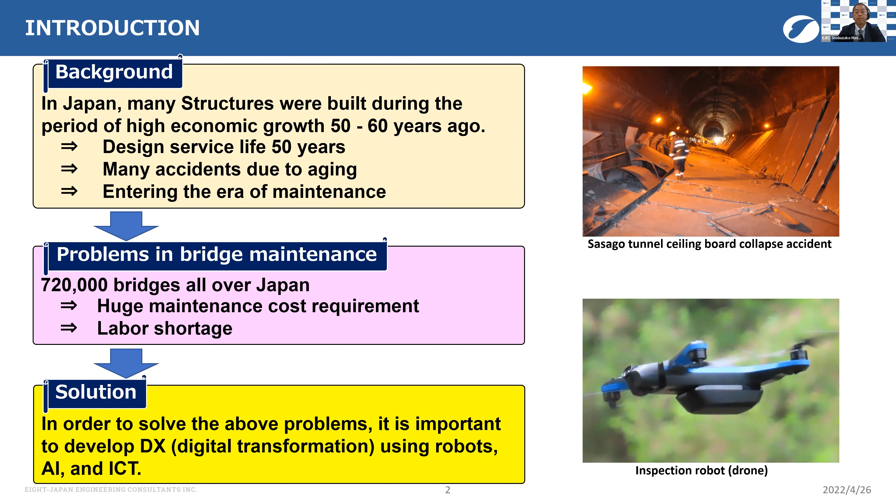These are the topics we will talk on today, divided into two parts. Firstly, research and development: number one, advanced bridge inspection and DX using drone; number two, utilization of 3D scanning and development of 360 degree editor; number three, development of water drone; number four, emergency damage reporting and development of local live stream with 4K web camera.

Secondly, introduction of non-destructive testing: number one, concrete tester used for testing compressive strength of concrete; number two, Auris exploration used for shape and damage exploration of structures. Thank you everyone, Rupesh will continue the presentation hereafter. Mr. Rupesh, please continue the presentation.

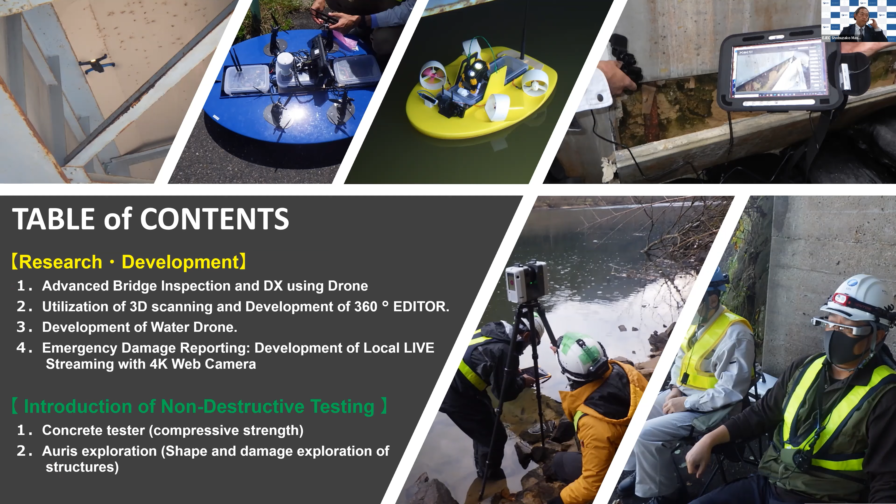Thank you, Mr. Shoubuzako-san. In continuation on the research and development, the first topic is advanced bridge inspection and DX using drone. We would like to give a brief introduction of infrastructure inspection and general bridge inspection methods being employed these days. Basically, infrastructure inspection involves collection of visual information of site conditions or damages if any, taking measurements, and conducting simple non-destructive tests like surface salinity test, compressive strength test, etc.

The general inspection methods being employed these days are as follows: ground level inspection, inspection using ladder, and inspection using bridge inspection vehicles. These are frequently used methods, whereas on special occasions or special sites, inspection through rope access and boat, etc.

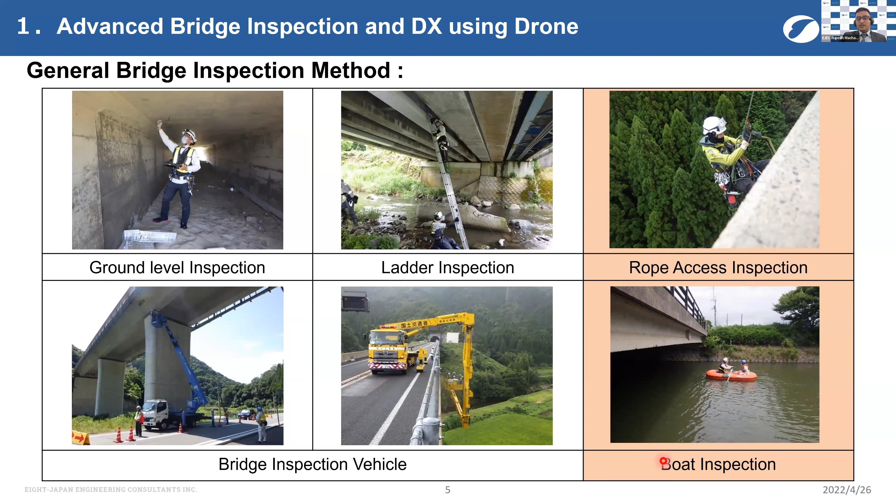Conventional inspection methods are labor intensive and time consuming. In recent days, technologies such as drones and scanners are being employed to carry out inspection and investigation work. In this session, we would like to talk about the utilization of drones in inspection and its advantages.

While conducting inspection on roads, especially busy roads, it is often necessary to regulate moving traffic to ensure smooth traffic flow. Enforcing road traffic regulation may sometimes lead to unwanted traffic congestion, which can be inconvenient to road users who are in a rush. Therefore, using a drone, this inconvenient road regulation is not necessary to be enforced.

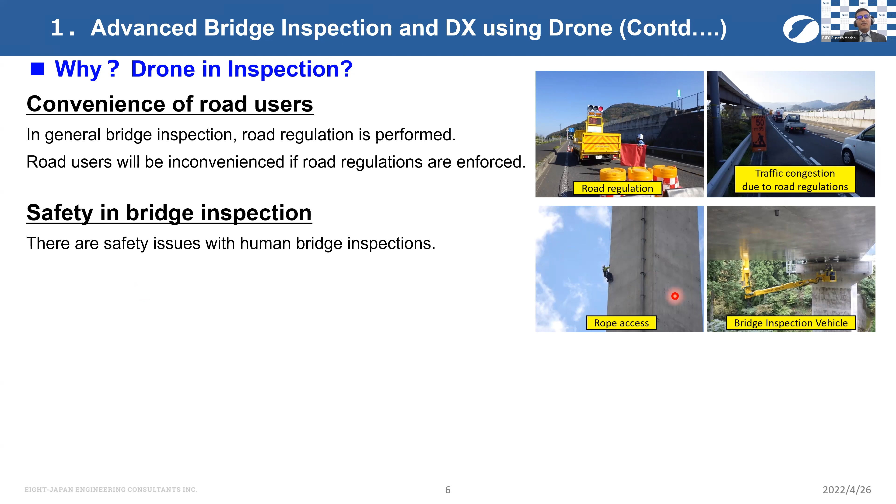Likewise, safety issues are a priority concern in inspection. Human casualties or risks of accidents in dangerous places, for instance breakage of ropes in rope access or falls from the bucket of the inspection vehicle, can be completely eliminated by using drones in the inspection.

Similarly, conventional bridge inspection methods require a large number of manpower and time, which increases the overall cost of inspection. Therefore, inspection using drones can be conducted with less manpower and in less time. The problem of manpower shortage in inspection can also be addressed using drones. Due to these reasons, drone inspection is preferable to other conventional inspection methods.

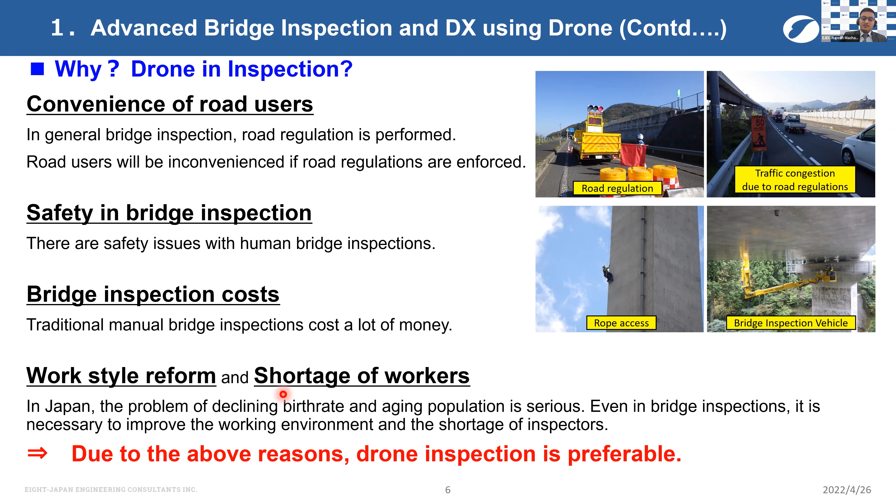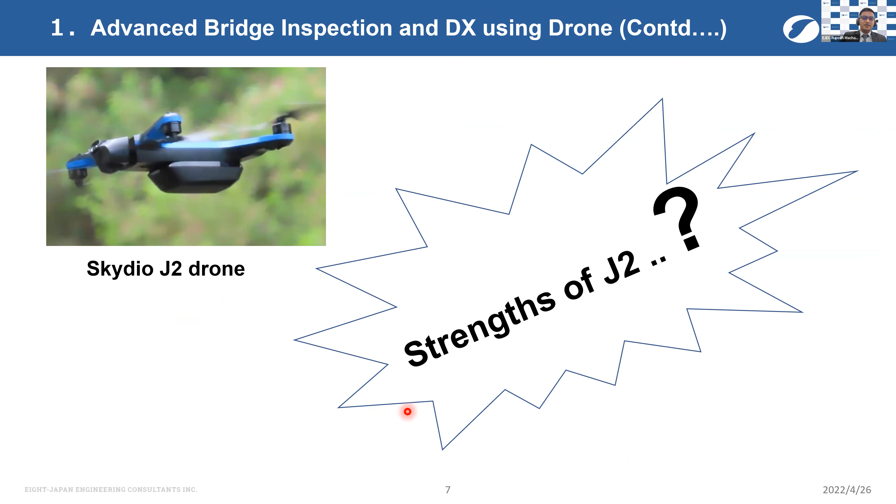Today we would like to introduce you to a high performance small non-collision drone, the Skydio J2. The general features of this drone are similar to other drones. However, this drone has some special features which are better than its close competitors. Let's move on to the strengths of the J2.

The first feature of the Skydio J2 drone is vertical or upper part shooting ability. While undergoing bridge inspection with a drone, the drone employed should have the ability to shoot vertically to ensure efficient coverage or a better view of the target. Generally, the shooting camera of a normal drone is mounted facing down, which is why it captures images or videos facing the ground from the sky.

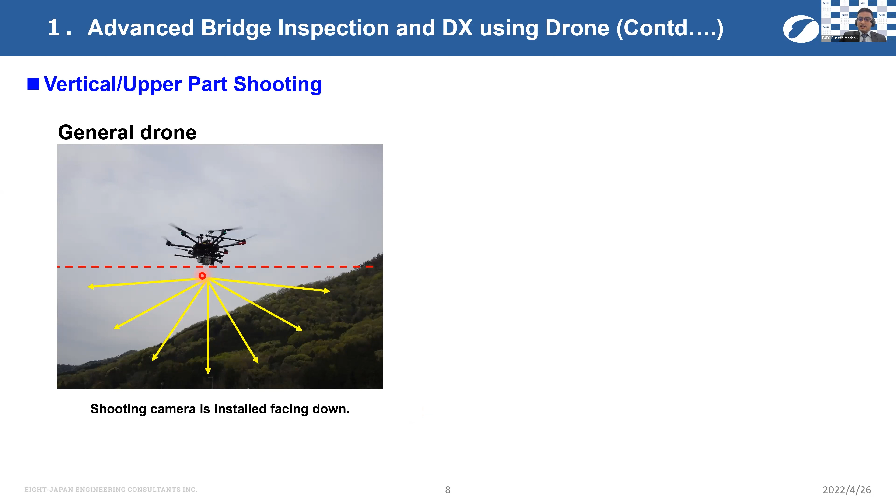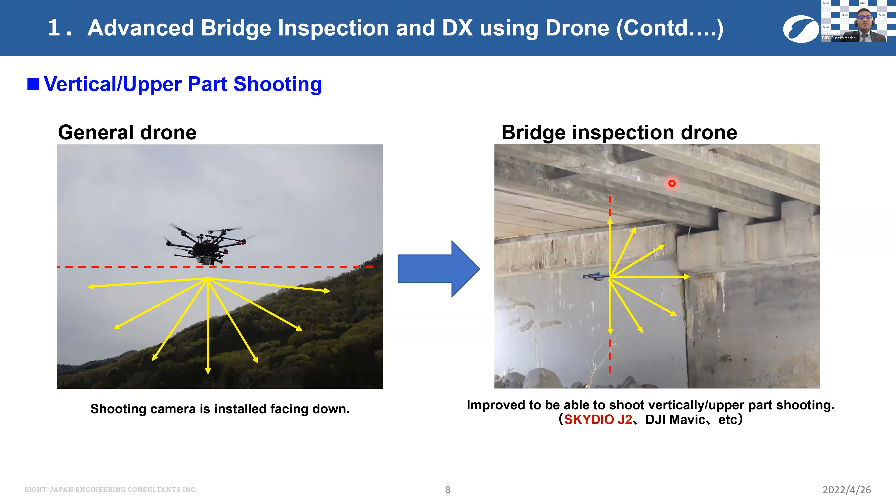To facilitate vertical shooting, technological advancement to improve the drone camera has been made. In particular, the Skydio J2 has its main front camera attached with a gimbal setup so the drone operator can adjust the shooting angle up to 180 degrees vertically. The Skydio has a unique function that allows the camera to face straight up, making it easy to shoot the ceiling under a bridge, which was difficult to shoot with a conventional small drone.

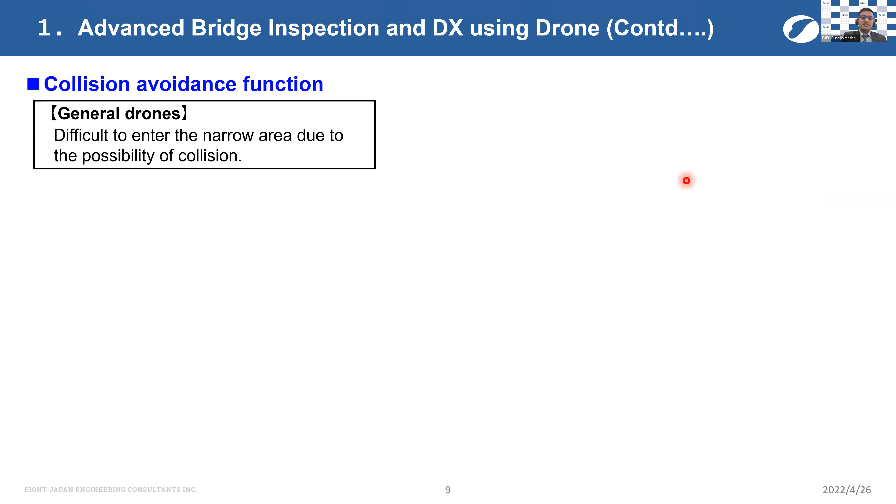Second is the collision avoidance function. General drones are difficult to use in narrow spaces between girders and trusses due to the risk of collision. However, the Skydio J2 can be operated safely even by pilots who have no experience operating drones in such places.

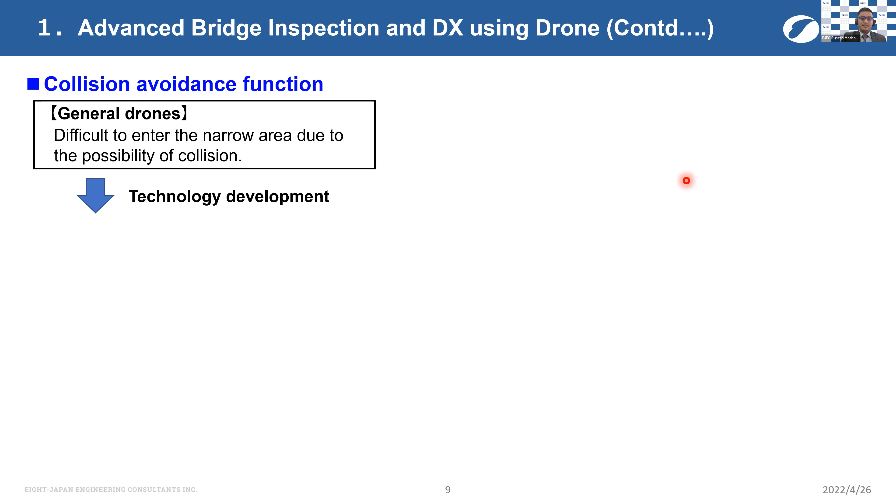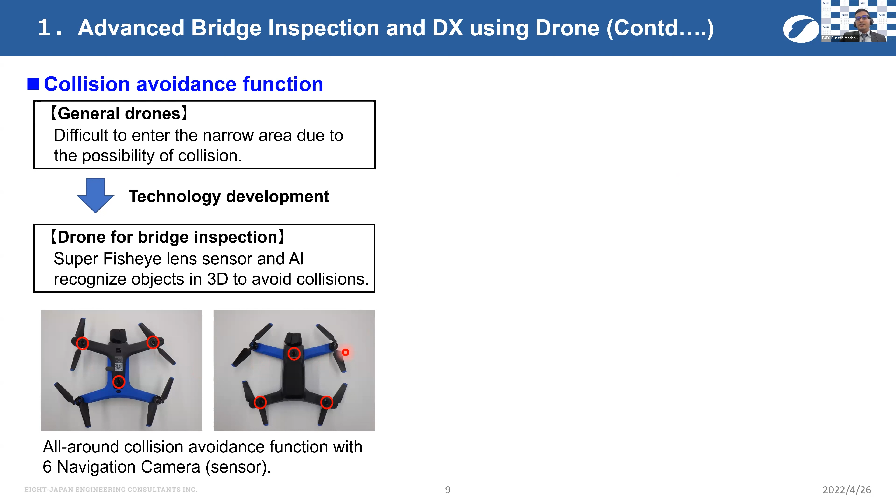Skydio J2 has 6 sensor cameras mounted on the top and bottom surface of the drone that take 360-degree pictures, and the image just taken is analyzed by AI to check the surroundings, recognize objects in 3D, and avoid collision. Obstacle avoidance allows the drone operator to navigate through tight spaces and conduct close-up inspection of detailed assets.

We can choose from 3 obstacle avoidance modes in the settings. The first is standard mode, which provides a safety barrier of 87 centimeters between the Skydio and obstacles. Close mode keeps the drone 28 centimeters apart from the obstacle, and minimum mode gives an 11 centimeter safety barrier between the drone and the obstacle. We can also disable the obstacle avoidance feature, however the disabled setting should only be used by experienced pilots.

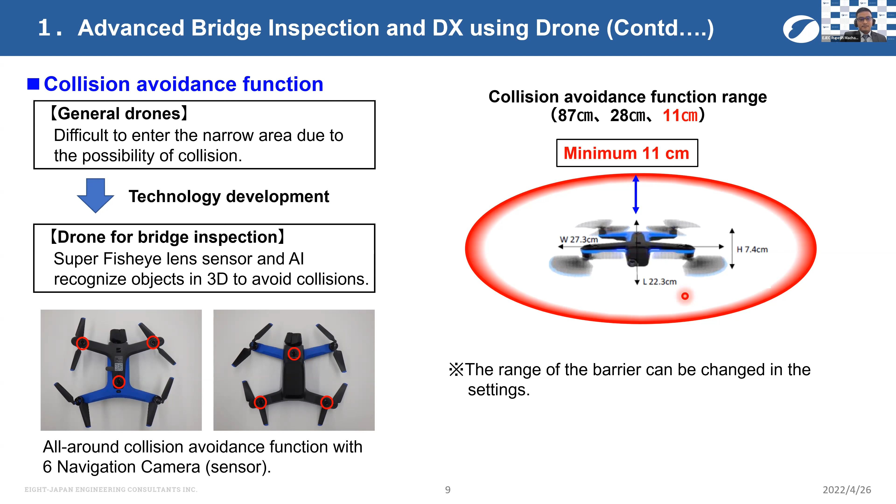Skydio J2 can also be flown in weak or non-GPS environments. As mentioned before, the Skydio J2 has 6 Super Fisheye lens sensors that take 360-degree images, which are analyzed by AI, so any obstacle near the surrounding is recognized to avoid collision. With these two features, collision avoidance and flight under non-GPS environments, the J2 has easy access to narrow spaces between girders and beams.

The video on the left is taken from a normal camera that shows the drone entering narrow areas smoothly, whereas the video on the right is the recorded video feed of what the drone is looking at. To understand the features more clearly, let me play a short clip of an actual drone inspection.

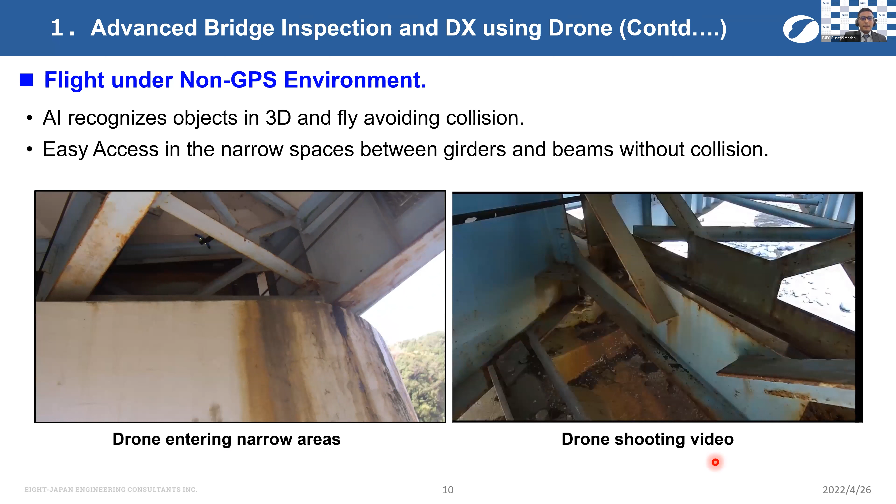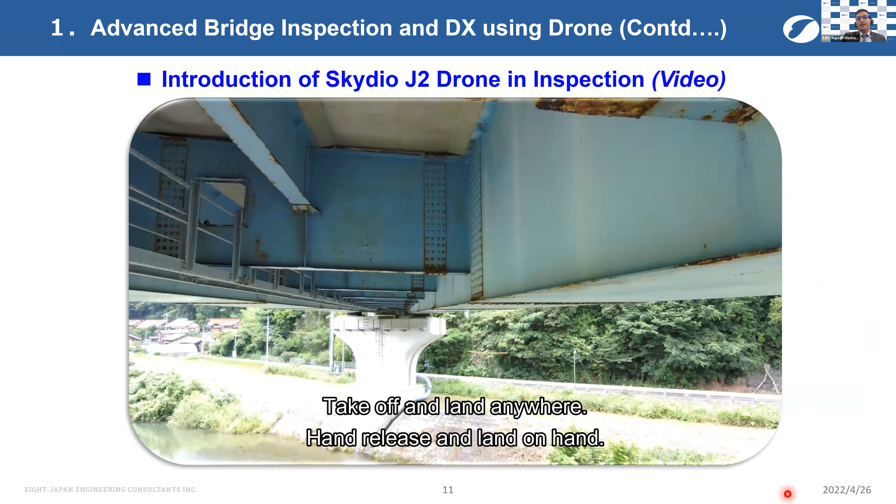Since the drone is small in size, takeoff and landing can be done by hand. This drone can be flown very close to the bridge components, allowing photographs to be taken as if from a close-up manual inspection.

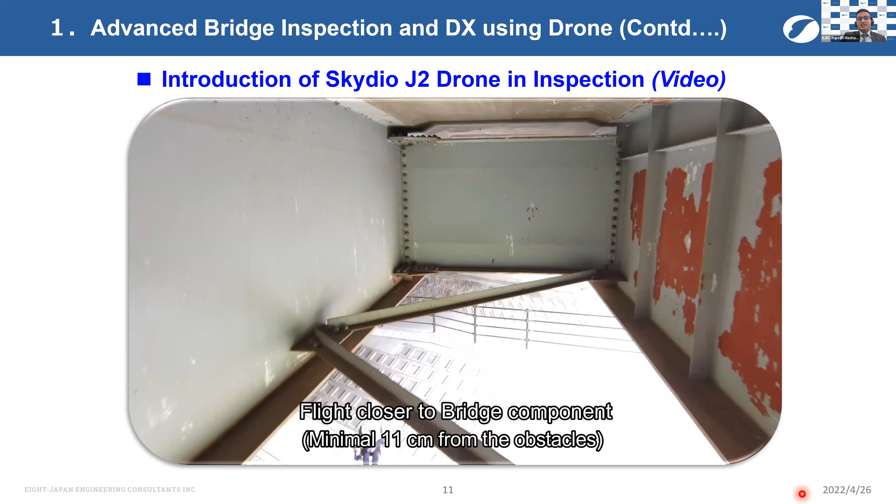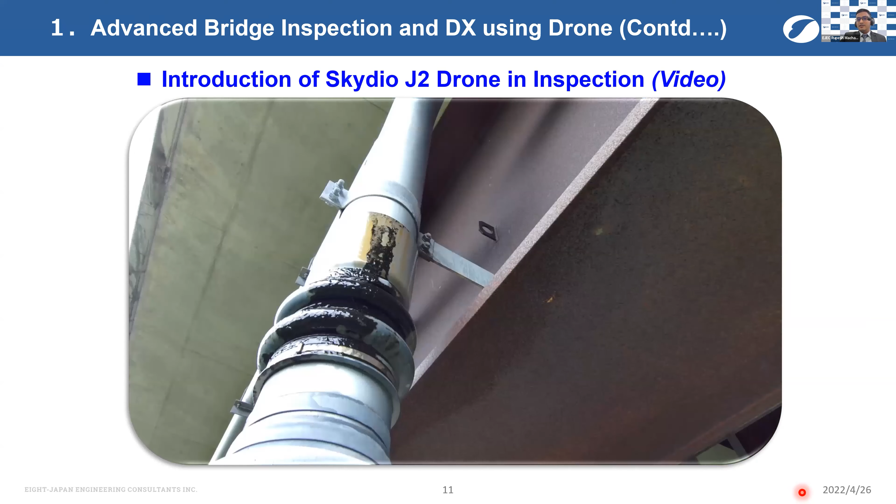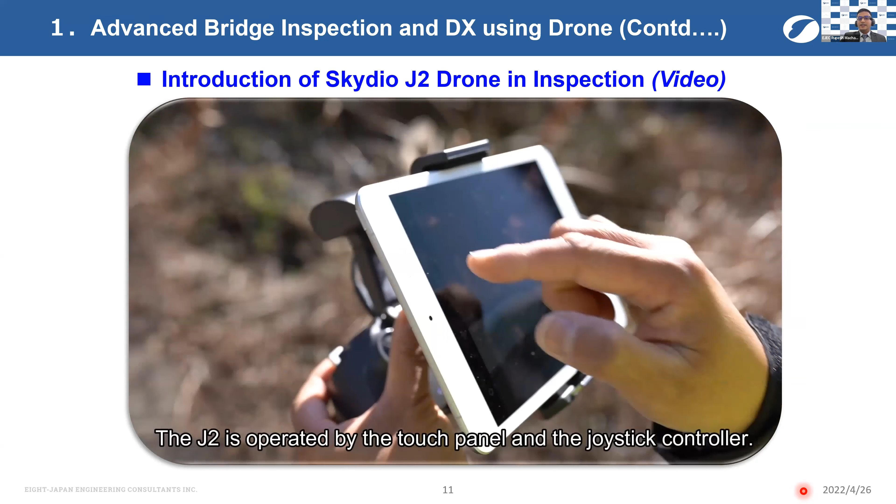Flying under weak GPS conditions, such as under the bridge, is possible without the risk of collision. This drone is operated using an iPad or joystick controller, as are many other drones.

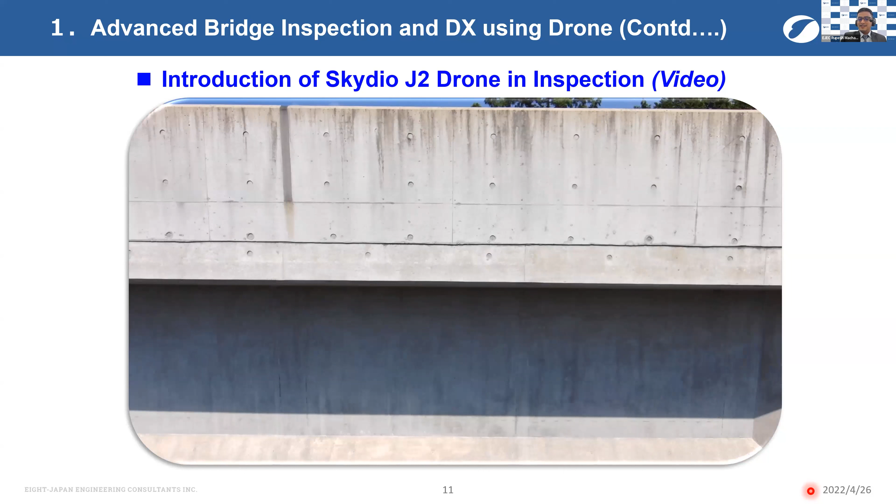Also, there may be risks of interference with pilot operation if many hands touch the controller. To avoid those risks, mirroring of the controller screen can be done with a large monitor, but the volume of luggage to be carried to the site increases.

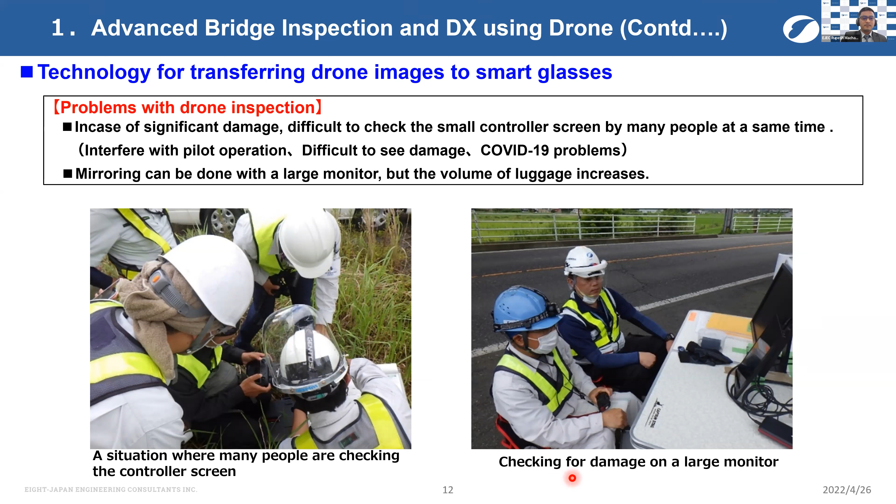With continuous study and improvement in technology, to solve the requirement of multiple drone views while undergoing inspection, smart glass technology was combined with a high-performance video transmitter, due to which the damage evaluator, primary inspector, and the drone operator can have the same drone view at the same time without any risk of interfering with the drone operation.

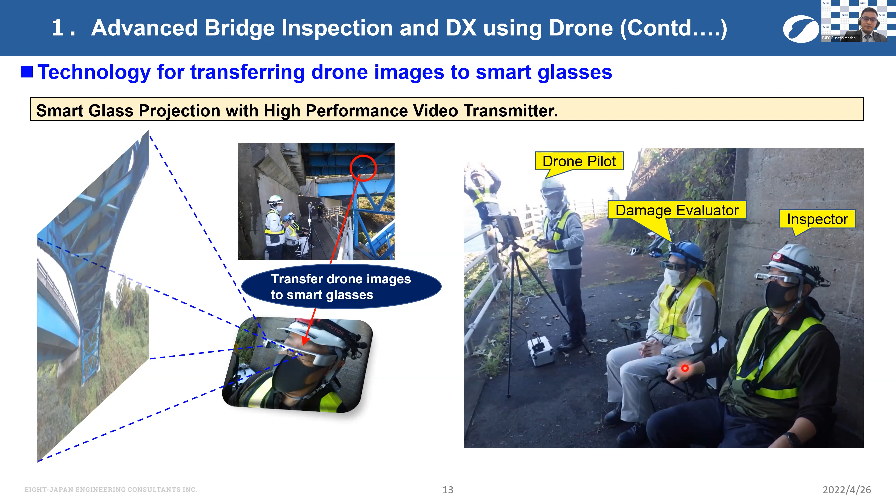Moving on to the second topic, which is the utilization of 3D scanning and development of a 360-degree editor.

In repair and seismic retrofitting design of existing old bridges, the designer requires final as-built drawings to base their design on. In most cases, there are often no drawings left, and even if available, design drawings may have some errors due to changes made during construction.

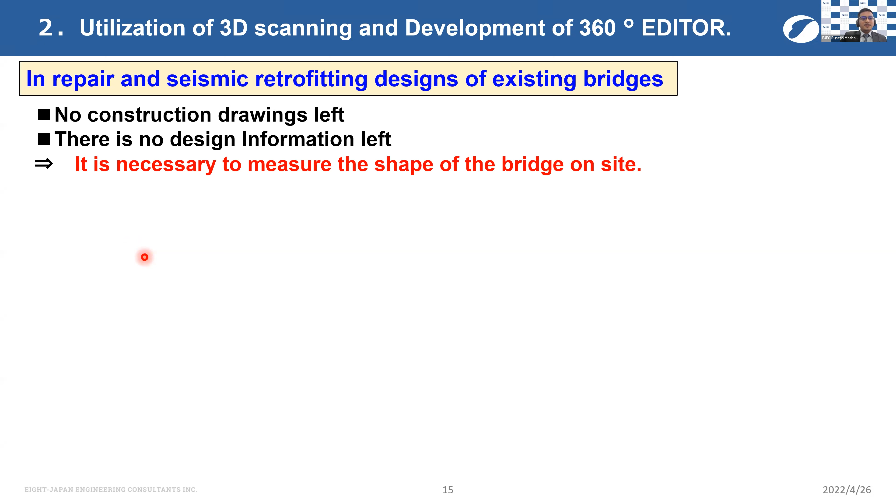For that reason, the inspector on site manually measures and creates drawings and other design information, but this requires significant time and resources, and can cause measurement error. They often fail to capture all the details, or may find errors in the original design as well.

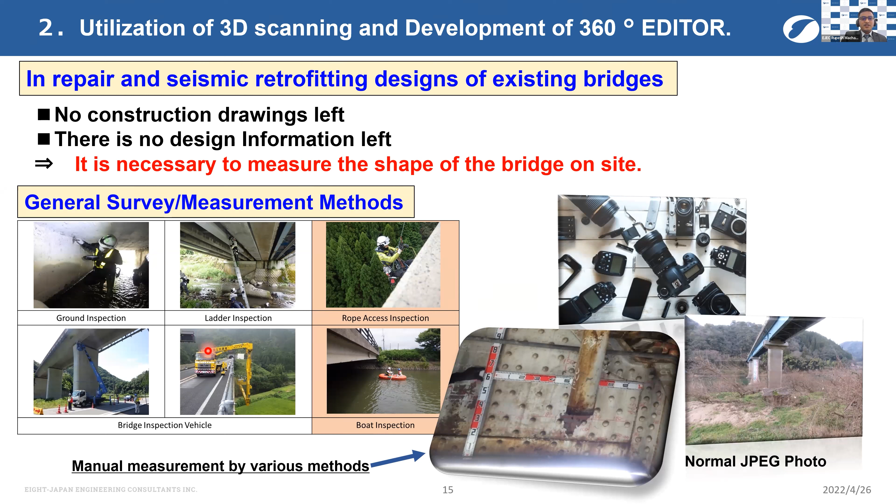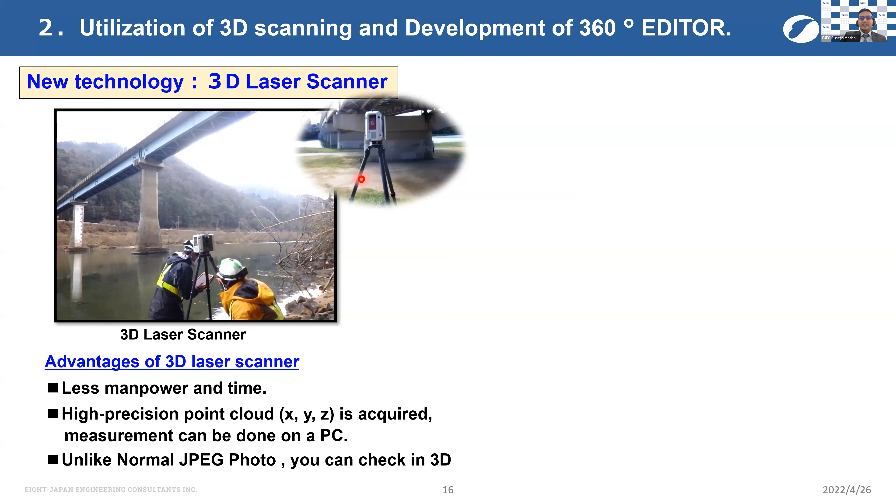Considering those problems, high definition surveying using laser scanner is introduced, which is a new method to capture a highly detailed 3D image during the inspection. In this method, instead of using conventional cameras to capture the visual image, lasers, which are much more accurate, are employed. Some of the advantages of using a 3D laser scanner are...

3D laser scanning can be conducted with less manpower and in less time. The 3D laser scanner collects a set of data points, also known as point cloud data, and maps them on a grid coordinate of X, Y, and Z, so that measurements can be taken on the PC. Unlike normal JPEG photos, we can also check the 3D scan in 3D.

Some of the uses of 3D scan data are as follows: mapping existing site conditions in renovation and rehabilitation projects, validating proper design execution, and measuring and evaluating progress. Using 3D scan, we can also create 3D building models.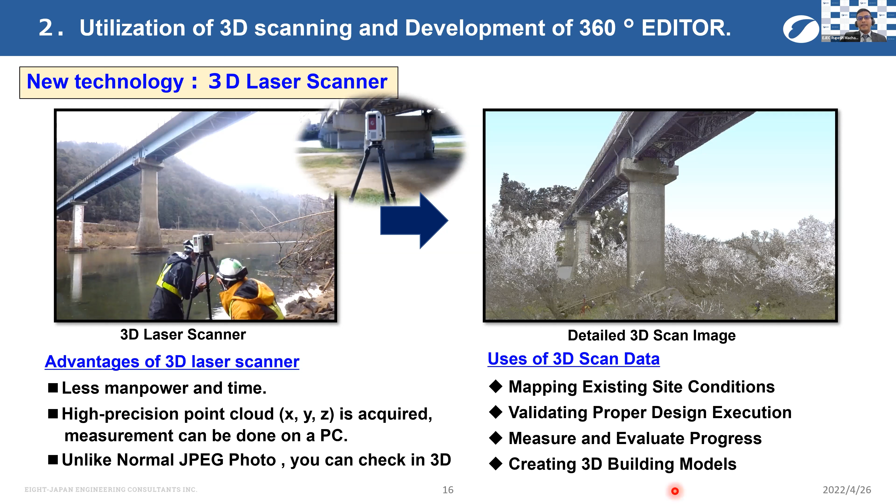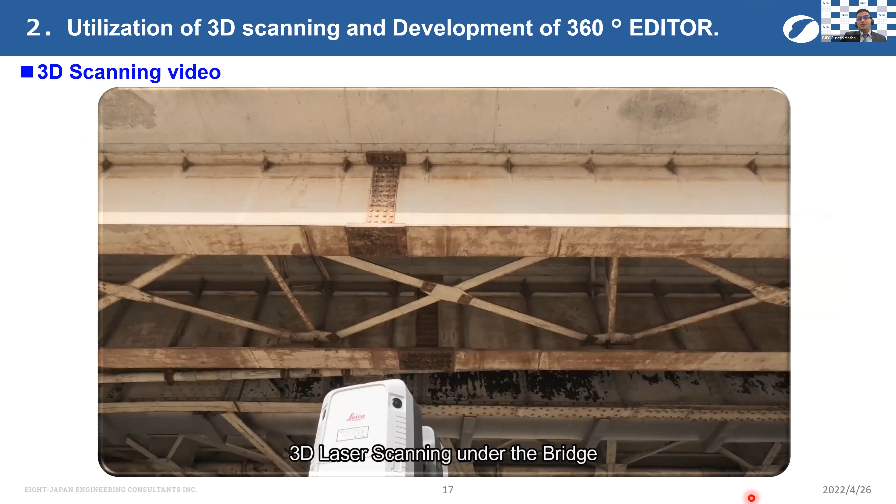This video is about the complete workflow from data acquisition on the site to 3D model creation for one of our repair and seismic retrofitting projects.

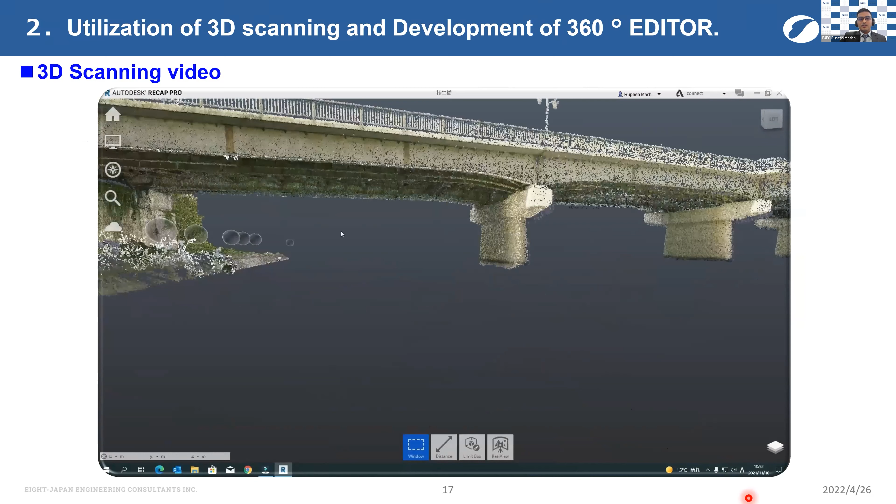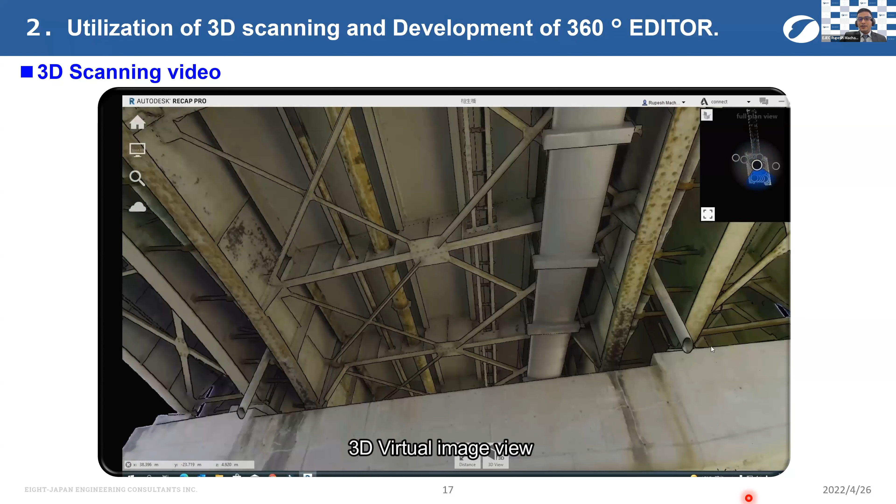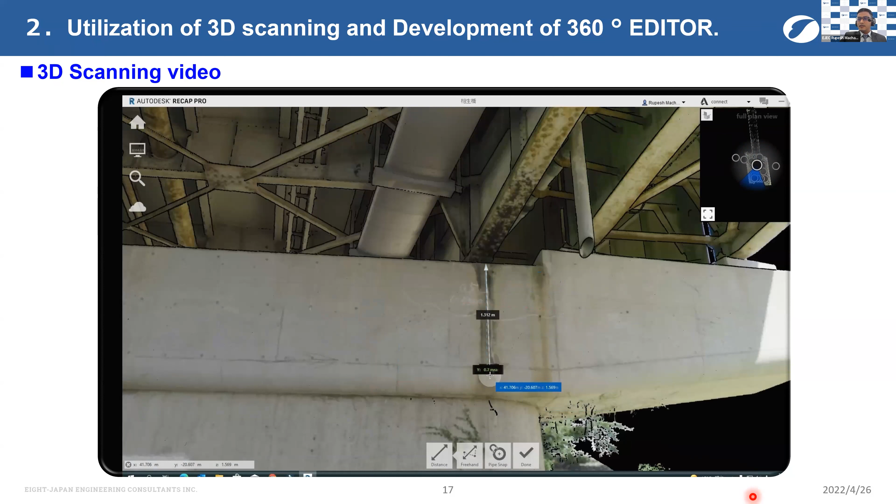So the transparent air bubbles are the scanner setups on the site, and this is the 3D virtual view. Using 3D scan, as I have already mentioned, measurements can also be taken on the screen. This is our final report of 3D model preparation using laser scan data.

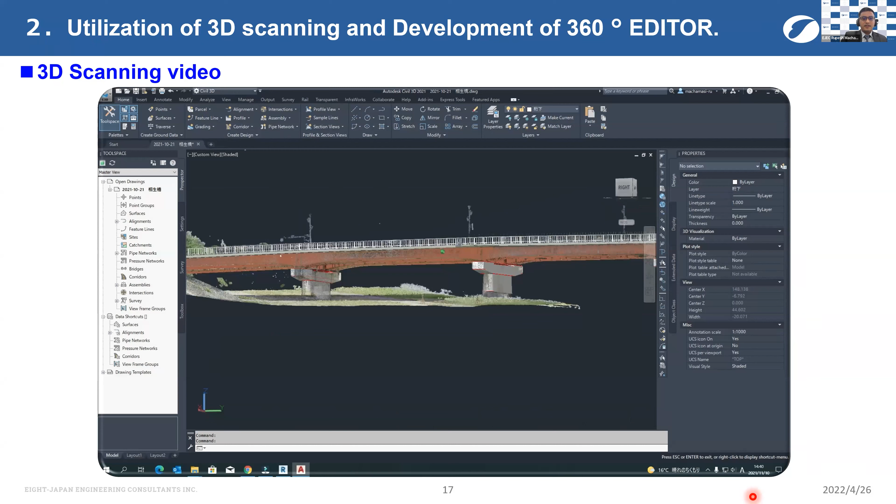As you've noticed in the previous video, the workflow to create 2D drawings and 3D modeling starts from 3D laser scanning on the site, followed by point cloud data processing and deleting unnecessary data, and finally creating 2D drawings and 3D models.

This is a normal method to create drawings from scan data. However, we are working on developing an automatic drawing generation tool or software to make the whole process of 3D modeling and 2D drawing creation much easier.

Despite this technology being easy and convenient to use, it still has some inadequacies. For example, creating a building information model is laborious and quite costly. 3D scans have a large file size, and delivery to the client requires a large storage capacity medium. Similarly, a dedicated application is required to open a 3D scan image, which may not be available to everyone.

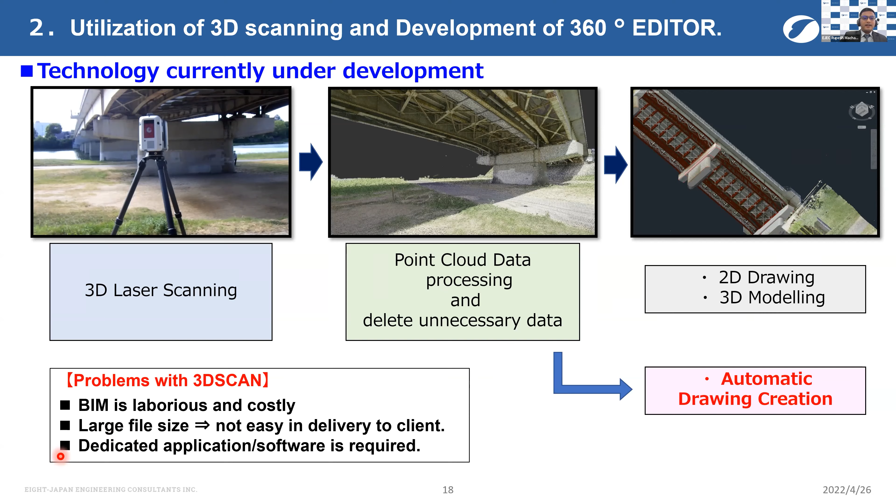Similarly, we have developed a much more user-friendly Kimoto 360-degree editor, which only requires us to take pictures with a normal 360-degree camera and combine the spherical photographs to create a 3D virtual model. That is why users can have a virtual walkthrough experience of the project site.

With 360-degree visualization, we can see the site from the same perspective as if we were in an actual site. The model prepared using this editor can be used as a 360-degree spatial smart library, as various applications such as Word files, Excel, PPT, etc. can be attached into this model. And it has a relatively low file size than 3D scan.

Similarly, complex structure and damage position can also be confirmed in 3D. Normally, 360 images cannot be viewed without utilization of a VR application or cloud VR, which requires significant cost. But there is a free VR app version of Kimoto 360-degree editor, like Adobe Acrobat. And this VR software can be provided to the client.

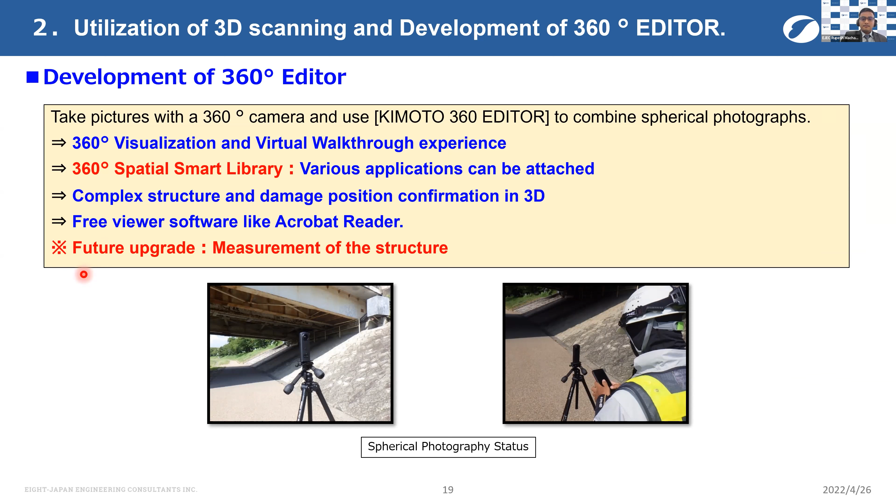This slide is about the basic overview of Kimoto 360-degree editor. It primarily requires 360-degree images, location map or design drawing over which the camera setup are placed, and attachment files to create a 360-degree spatial smart library model, which has relatively low file size. On one click on the link icon, we can open and view the information attached.

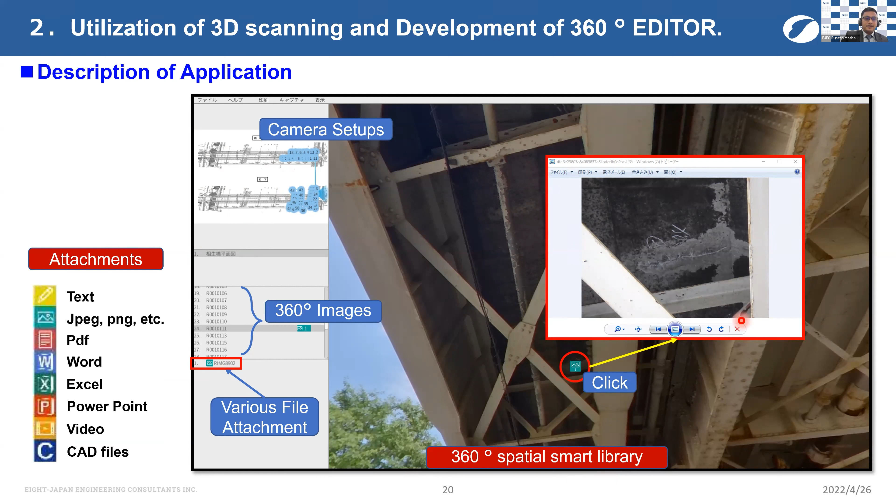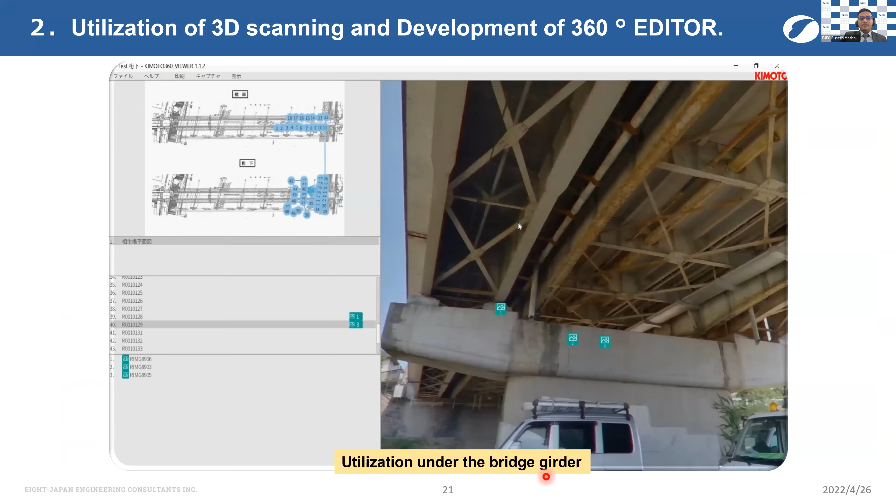Let us watch an example model, utilization under the bridge girder. In this virtual model, we have attached important details such as damage photos, design reports, etc. And thus we submitted this model as a digital report to the client.

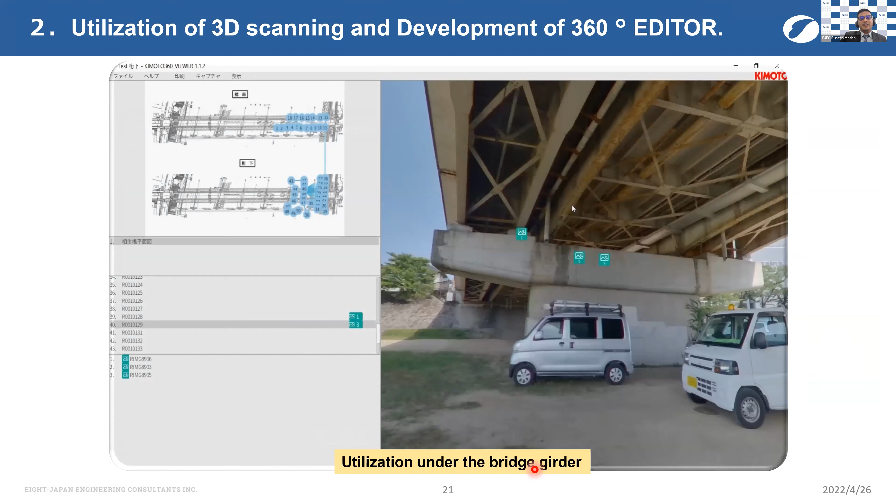So most of our clients have evaluated our model prepared using this 360 editor as easy to evaluate.

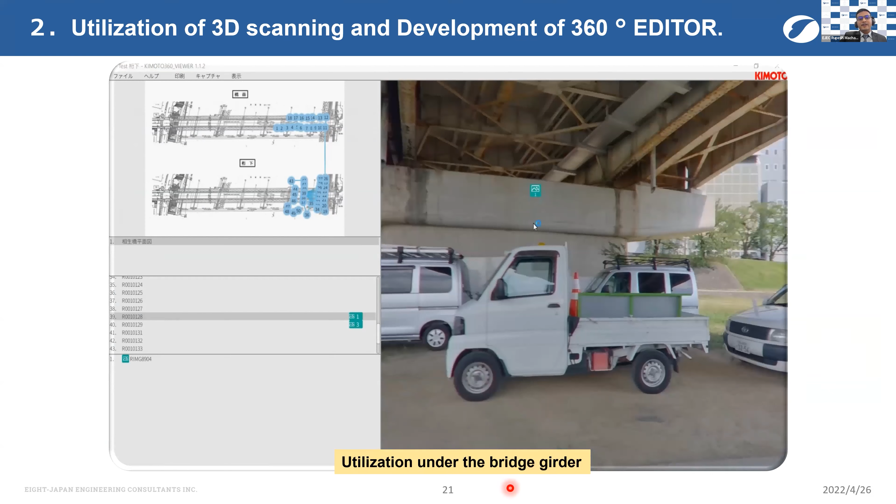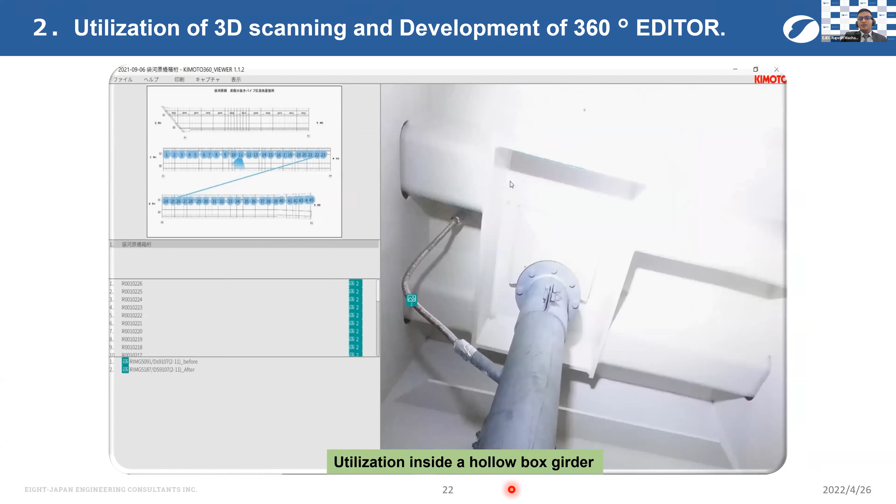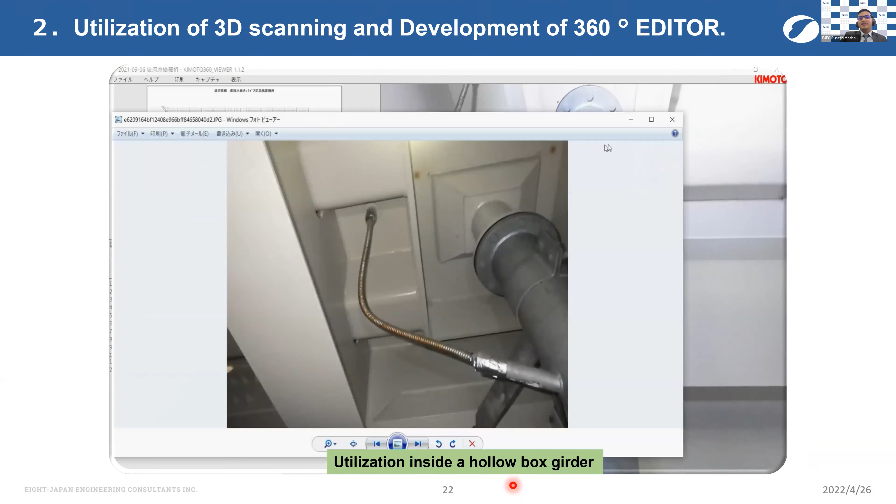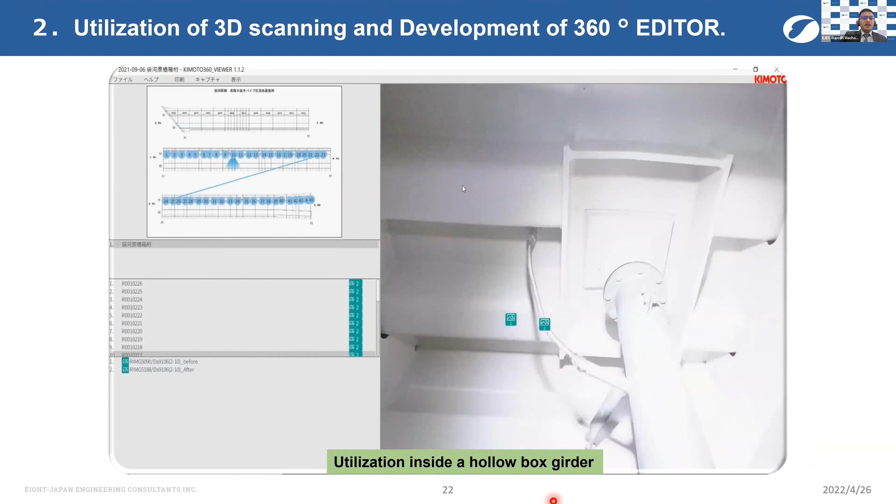Similarly, the 360-degree editor can also be applied in dark areas, such as inside a hollow box girder with minimal lighting equipment. The inside of the hollow box girder is very small and narrow. Therefore, even if we take a 2D picture, we will not be able to know where we were taking that picture at later stages of the project. However, we can use the 360 editor to find out where the damage is located in 3D.

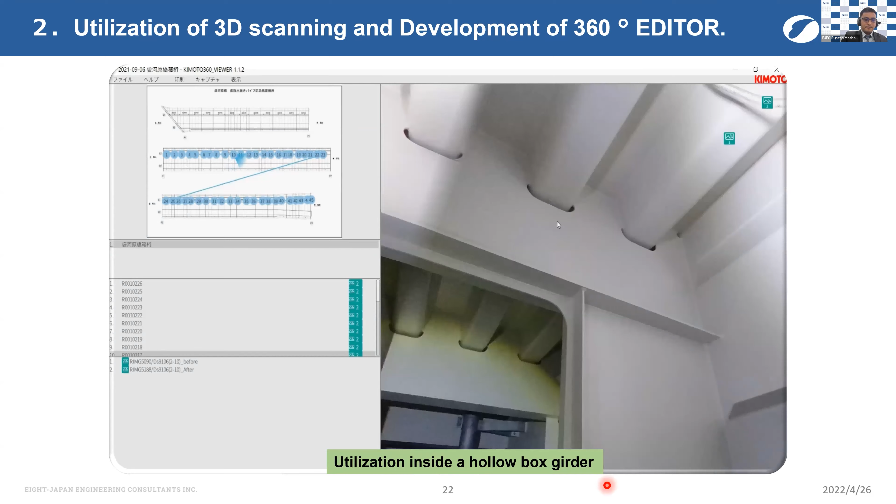So moving on to the third topic, we have development of water drones. Water drones work on the same principle as the aerial drone works on. It is driven by 4 air propellers mounted on the deck of the boat. Because it is an air propeller, underwater aquatic plants and algae will not get stuck in the propeller during the operation. So if the water depth is 10 centimeters or more, the water drone can be used in most water bodies. However, it requires an operating space minimum of 350 mm height and width of 1,500 mm.

Currently, we have 2 models of water drone. One is the yellow water drone, and the second one is the underwater sonar drone. The yellow water drone has a camera and LED setup, and this drone is basically used for routine inspection of narrow structures, such as under the box culvert. Whereas the underwater sonar drone, on the other hand, can be used to investigate the scour depth of the riverbed around a pier or abutment.

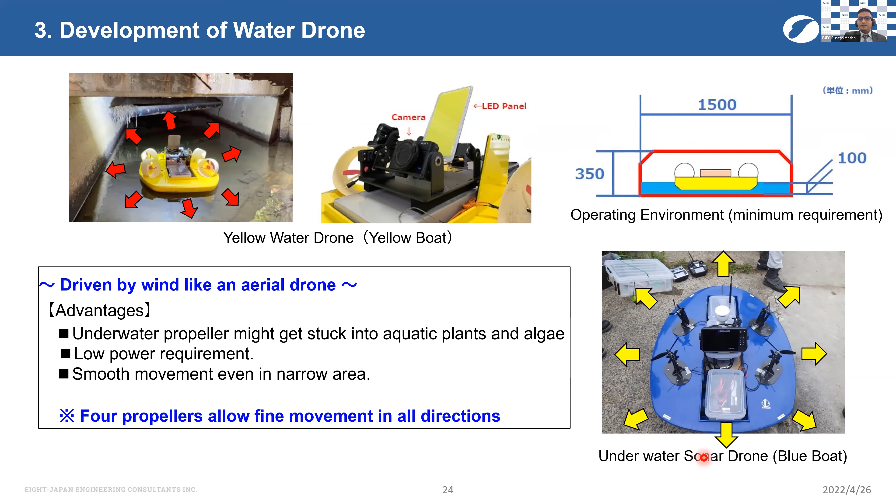Inspection of high water level box culverts by conventional or manual methods is quite difficult and dangerous. There may be risks of submersion of the inspector, emission of poisonous gases, etc. This also makes it difficult for an inspector to conduct inspection inside a narrow waterway box culvert. As you can see in this picture, it is quite difficult for the inspector to investigate.

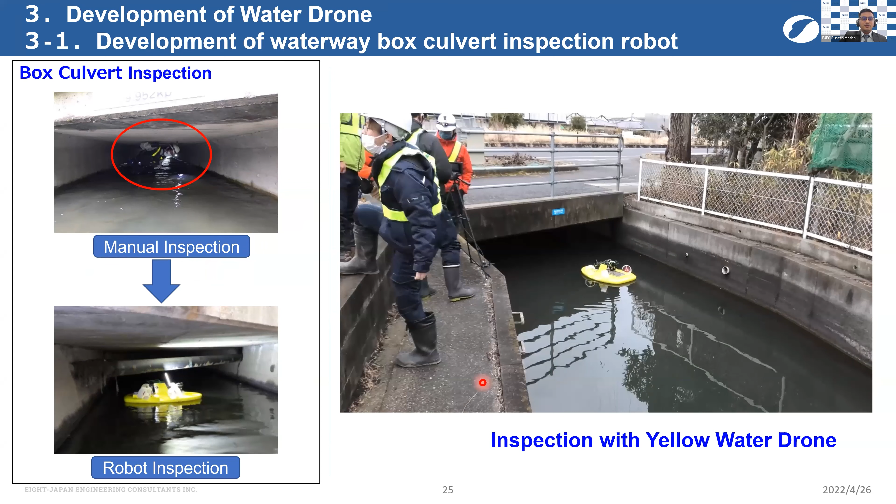Therefore, water drones can be efficiently used in such places, like in this picture. The video on the right side is about the actual inspection of the waterway box using the water drone. So it can freely move inside the narrow box culvert.

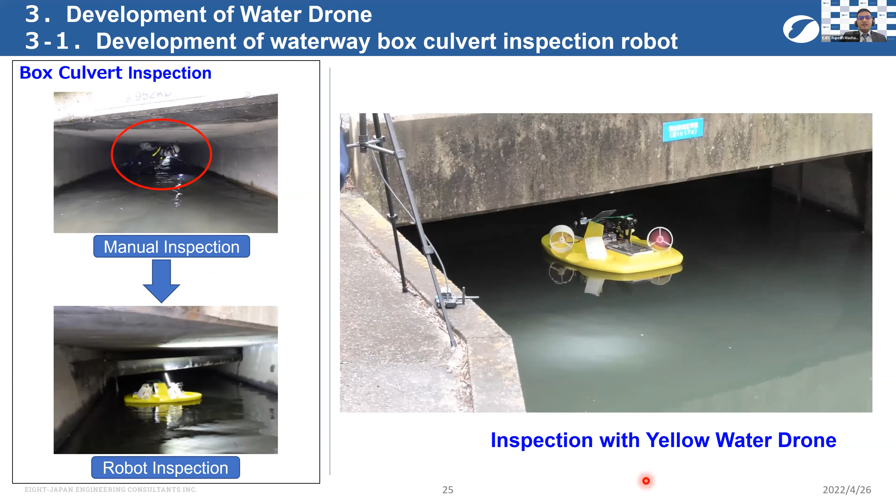Similarly, while conducting periodic bridge inspection in Japan, it is necessary to conduct a scour survey around the piers and abutments. Currently, scouring surveys are conducted by manual measurement, such as using measuring staffs. Diving measurement is also employed, but the labor and cost requirements are huge. We have also developed an AUV autonomous underwater vehicle and ASV autonomous surface vehicle to conduct large-scale underwater surveys, but it requires large-scale equipment, so it is quite difficult to use them easily during the bridge inspection.

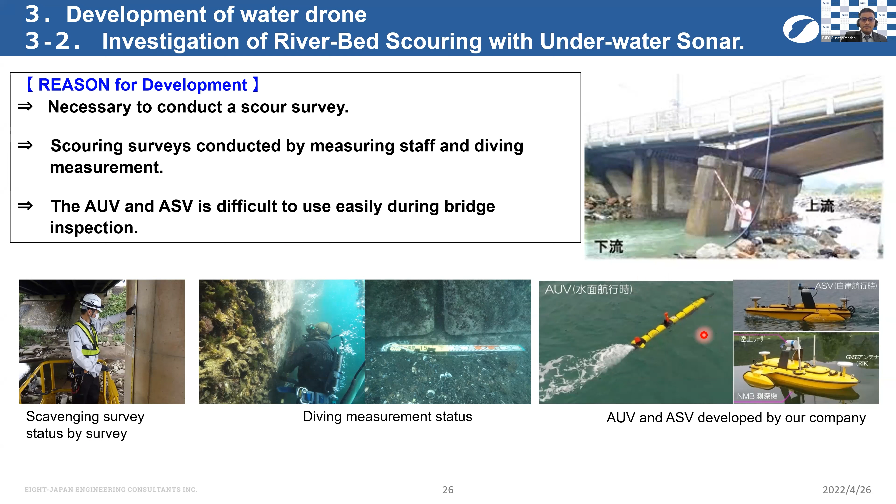Using the underwater sonar drone, the underwater mapping can be easily done for the investigation of scouring phenomena. The analysis report can also be shown by creating a 3D model using the data, as we can see on the video on the right side.

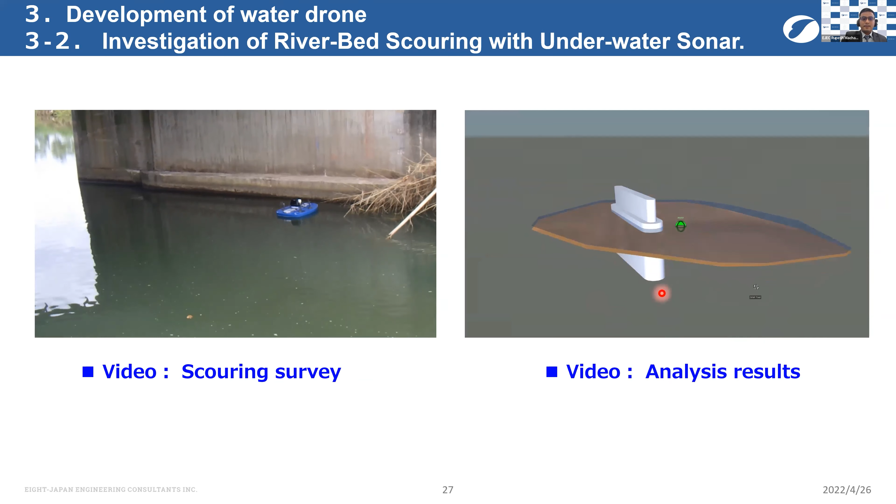Moving on to the fourth topic, we have development of local live streaming with 4K web camera. In many cases, it is often necessary to report very significant damage from the site for which immediate solution is needed. Reporting can be done using a normal webcam, but the image quality of a regular webcam is very low, and minor damages such as cracks of around 0.1mm cannot be clearly seen in the office or on the client side.

Therefore, we have developed a local live streaming system using a 4K high definition camera to deliver clear images to the client, participant from the office, or expert from the office. This camera is also compatible with all devices supported by Android, iOS, or Windows system.

A live web interaction can also be conducted where clients participant from the client side, expert from the office, and inspector on the site can participate in real group discussions on serious damages, and the experts from the office and the participant from the client can also instruct the on-site inspector what to do next.

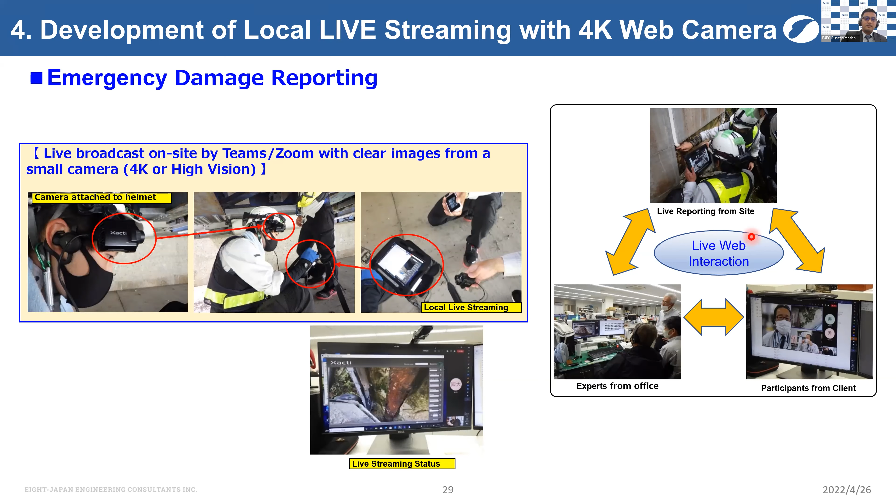The next topic we have is introduction to non-destructive test, under which we have concrete tester, which is used to determine compressive strength of the concrete.

As we all know, rebound hammers have been widely used for non-destructive compressive strength testing of concrete for a very long time, but the standards for calculating compressive strength using rebound hammer varies from country to country. In Japan alone, there are many standards to calculate compressive strength.

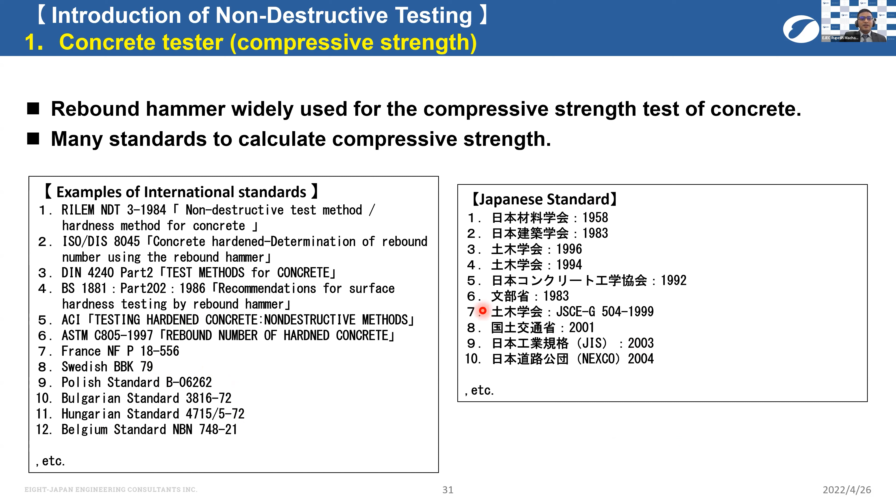Similarly, the concrete tester is also a non-destructive concrete compressive strength testing estimating device. It can be used to measure mechanical impedance or spring coefficient of the concrete surface by the direct hammer blow, then estimating the compressive strength of the concrete.

In addition to compressive strength of concrete, it is also possible to detect the degree of surface deterioration of concrete as additional information. This device consists of a main body and a hammer unit. To measure compressive strength, we just require to tap the surface of the concrete with a hammer. All the measurement data are recorded on the SD card.

The results can also be produced in Excel format via a dedicated program on a personal computer, which can greatly reduce the data organization time.

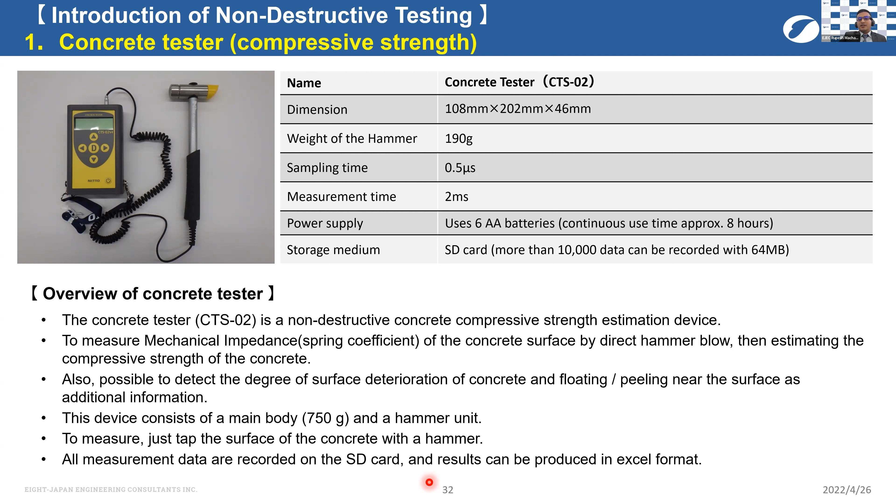The basic principle of concrete tester is measuring maximum force and hammer speed during the hammer blow. The yellow part on the hammer body is the accelerometer, which measures maximum force and hammer speed at which the concrete surface is struck by the hammer.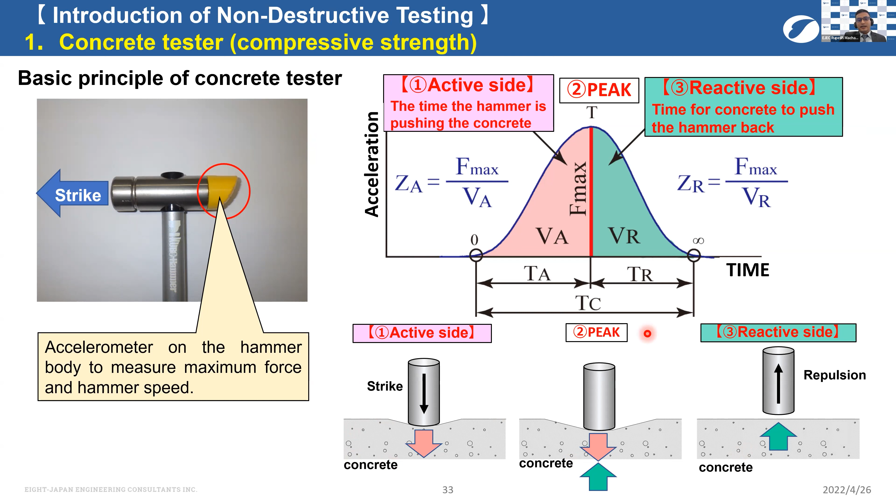On the active side, surface deterioration may be observed from the hammer blow, and that is why the strength of the concrete may be affected in the active stage due to the effect of energy loss. Whereas on the reactive side, the effect of energy loss is reduced significantly. Hence, it is possible to calculate the strength index value that reflects only the elastic properties, which is not affected by the surface condition.

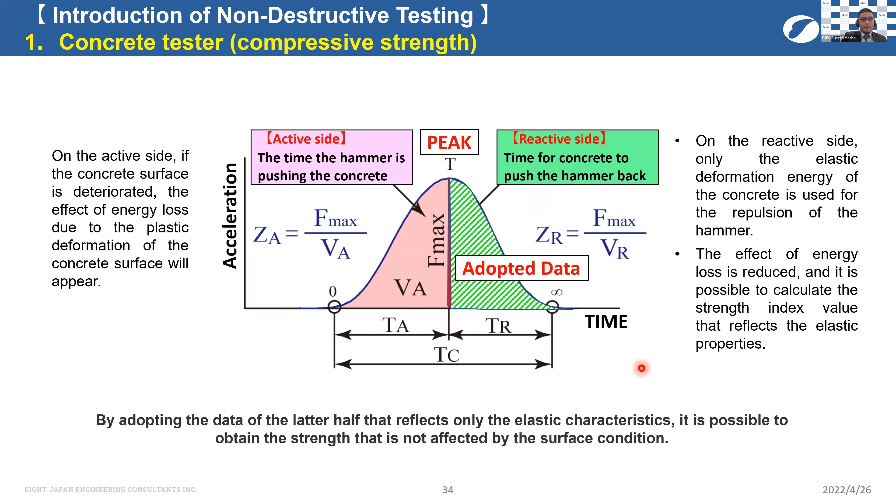Whereas the test result using concrete tester is almost constant regardless of the condition of the concrete surface. Likewise, the rebound hammer had to measure a set of rebound value and calculate the compressive strength by desk work. Even correction is also necessary for angle of placement of the plunger.

In case of the concrete tester, the compressive strength of concrete is analyzed internally and displayed on the monitor automatically. So this saves time for both on-site work and desk work, obviously.

There is also a limitation of maximum force that can be exerted on the surface of the concrete using rebound hammer. So it is difficult to be used in case of high strength concrete. But the result of a concrete tester has better accuracy than the result in Schmidt hammer test.

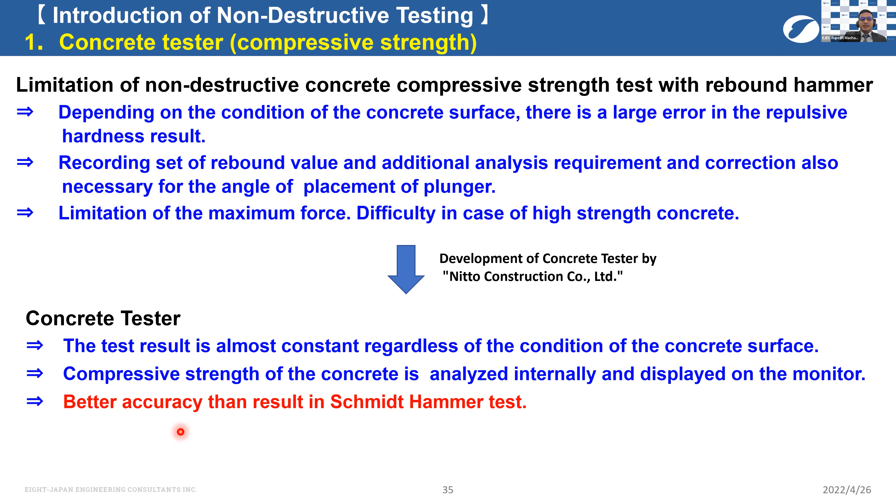The compressive strength estimation range for rebound hammer is just from 10 Newton per mm square to 70 Newton per mm square. That is why it is difficult to be used to test compressive strength of high strength concrete.

The estimation range for concrete tester is 10 to 150 Newton per mm square. So it can be used for high strength concrete testing also. Data correction for rebound hammer is required, whereas data correction is not required for concrete tester. Similarly, the number of measurement points that can be measured and data organization time for concrete tester is higher than the rebound hammer test.

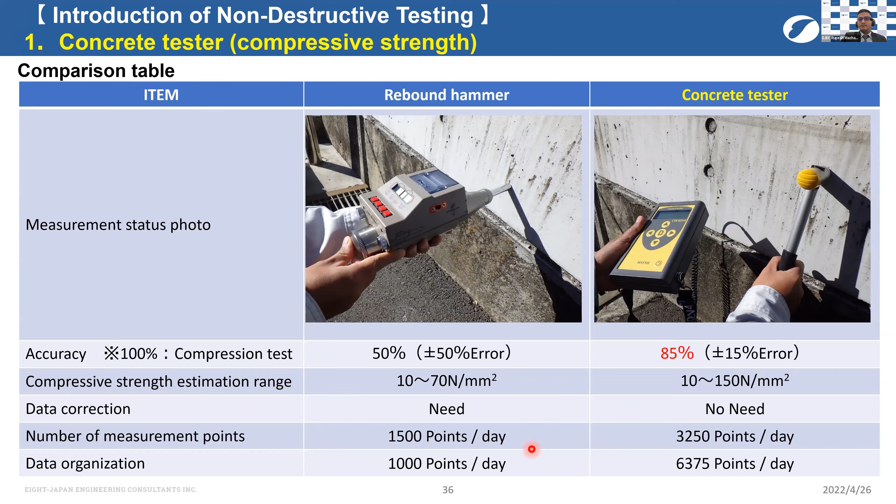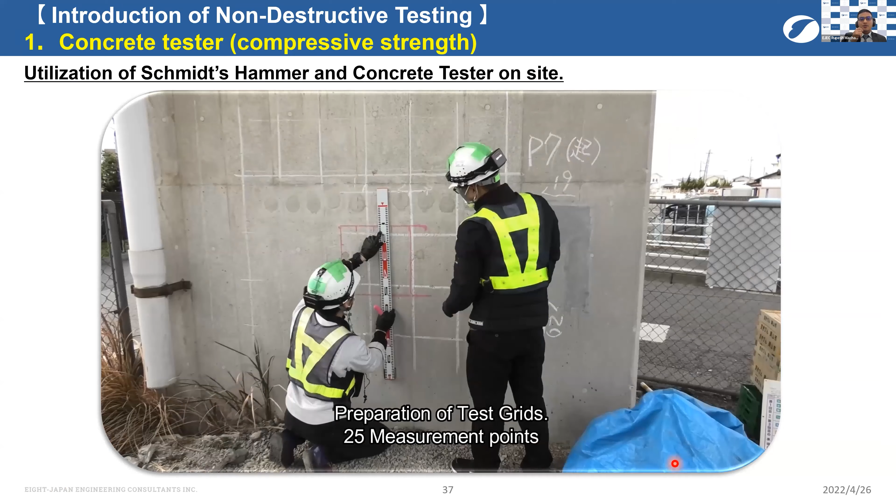This video is to show utilization of Schmidt hammer and concrete tester on the same site where core samples for compressive core test were taken previously.

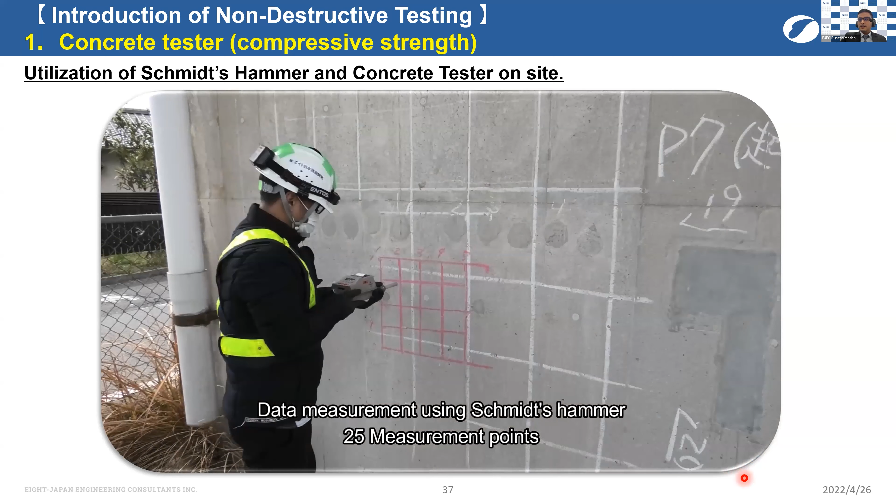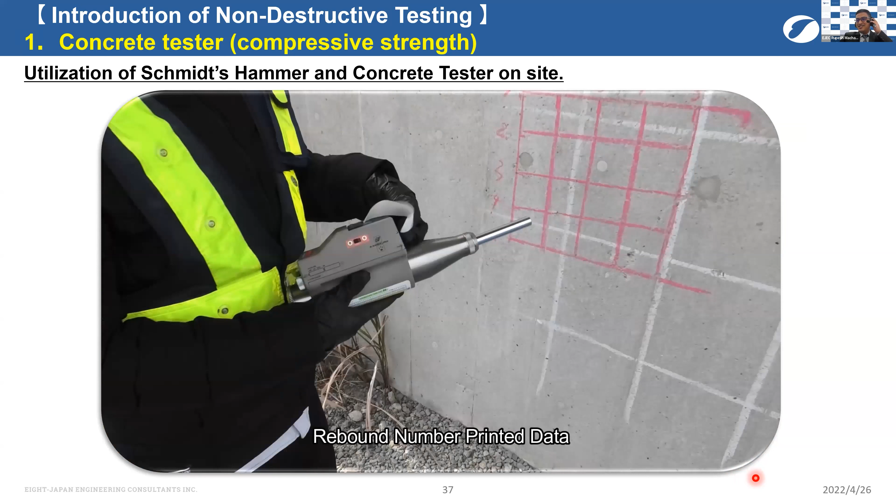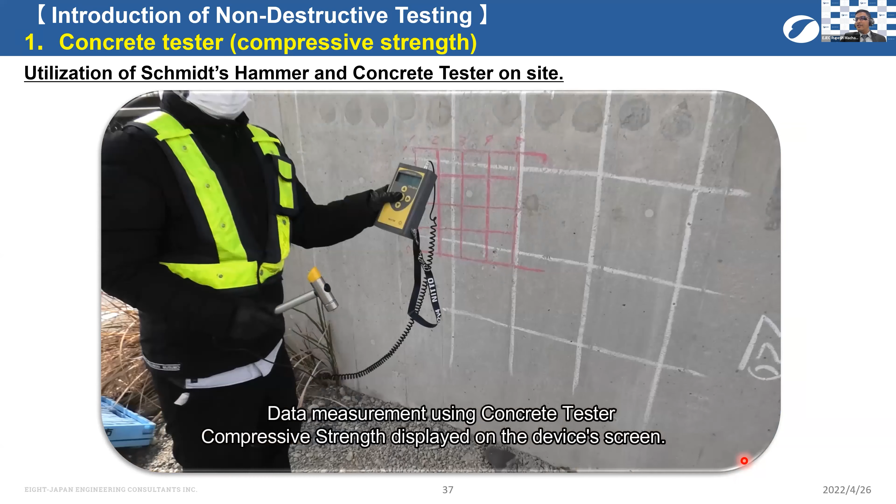Using concrete tester, after a direct hammer blow on the concrete surface, the compressive strength of the concrete is displayed directly on the screen of the concrete tester. STR is the compressive strength, and 25.4 is the compressive strength in Newton per mm square.

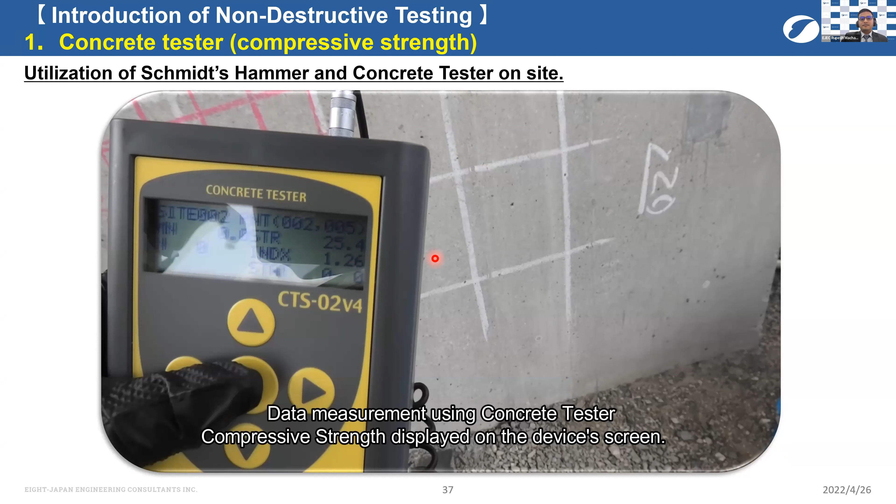Similarly, the compressive strength obtained for Schmidt hammer test is 32.1 Newton per mm square, whereas it was 27.732 Newton per mm square for concrete test hammer.

The percentage error in compressive strength obtained from rebound hammer test is greater than 30%, whereas it was less than 15% in case of the concrete tester.

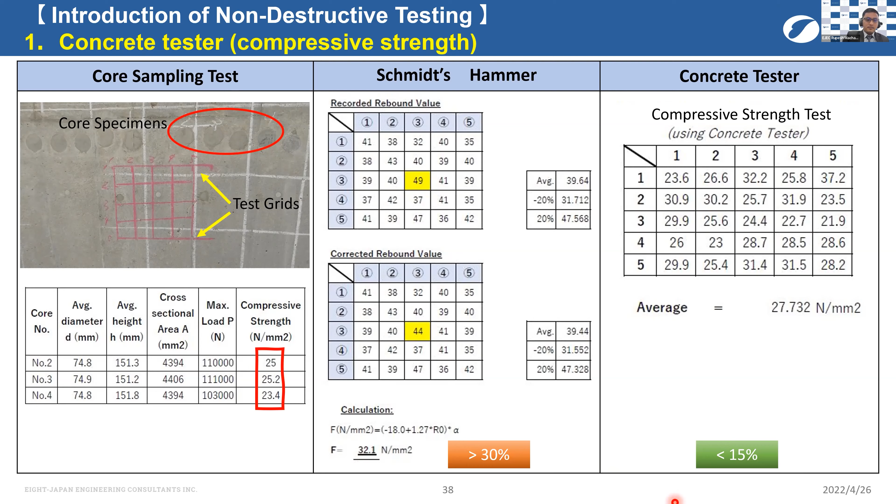So the next topic is Auris exploration.

Many disasters such as earthquakes and floods frequently occur in Japan. For strength verification of existing structures or for various reinforcement designs, such as in repair, maintenance, and rehabilitation, all design report or information may not be available in most of the cases.

The shape can be confirmed by measurement or surveying in the aerial part, but not in the underground part. In addition, the damage to the underground structures after a disaster cannot be confirmed easily. For this reason,

Auris exploration technique can be used to investigate shape and damage in the underground structure. For example, it can be used to estimate the depth of the wall structures, foundation, depth of sheet piles. Similarly, it can also be used in PC steel wire breakage investigation, investigation of effect of alkali silica reaction, and such.

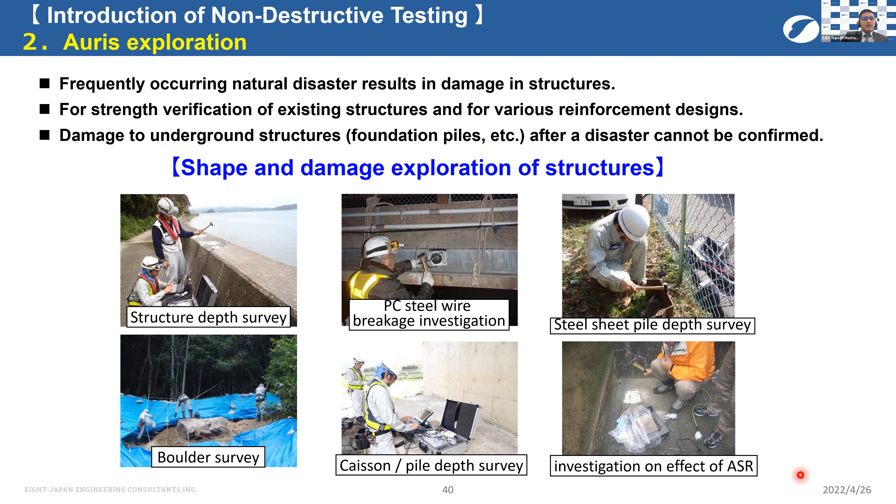Like the Auris exploration uses the principle of impact elastic waves to detect the shape and damage of the structures in the ground, buried in the ground by non-destructive technique.

In this method, the time at which the shock wave hit by the hammer returns to the deep position or damaged position of the structure is measured, and the elastic wave velocity of the structure is multiplied by that time to confirm the shape and damaged position.

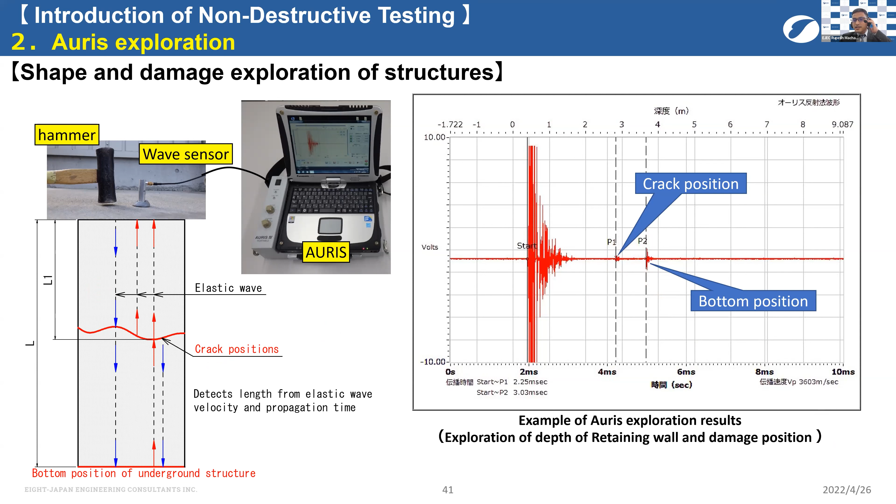Thank you, Rupesh. At the last of our presentation, I would like to talk a little about the technology currently under development.

The development technology introduced today have already been put into practical use. We are still doing a lot of research and development. For example, regarding the bridge inspection by using drone, we are developing as follows.

Currently, we are operating with Wi-Fi. But we are proceeding with development to shift to mobile phone radio waves, 4G or 5G. The merit of this is that you can operate the drone from the PC in the field.

This makes it possible to check for damage in the field without the need for professional personnel to go to the site.

We are also developing a drone equipped with AI to determine damage. This can notify on-site inspector and office or bridge managers in the event of serious damage.